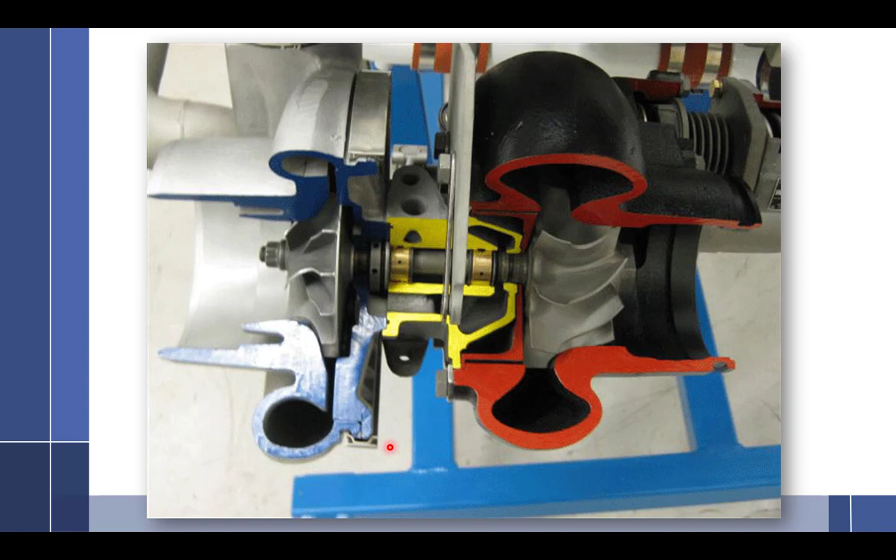All right, there's just a cutaway of a turbo. Let's see, which side do you think is the compressor—this side or this side? Red or blue? You guys are just so stinking smart. It's the blue side. Why is this red over here? Because it's hot.

As air enters the compressor, it's going to come out through the edges, be compressed. There's a lot we could talk about with this turbo. These things take a punishment, because we're talking extreme heat over on this side, right? And that means you have to be very careful with what kind of seals you use in here, because those seals are going to melt.

These are spinning at some extremely high RPMs. It means we need oil fed through here. But the temperature in here is so hot that oil left sitting there is going to coke. And if you coke that oil up - remember, coking is when oil crystallizes - you're going to ruin your turbocharger. So pilots who care about their turbocharger will always do a long cool down period. Why are they just sitting there? Well, it's because they had a flight, they came in, they landed, and they weren't going to just shut down their engine. They're going to sit there and let that turbo cool way down and let the oil flow through until the turbo is cool enough that when they shut down, whatever oil's left in this area isn't going to coke on them.

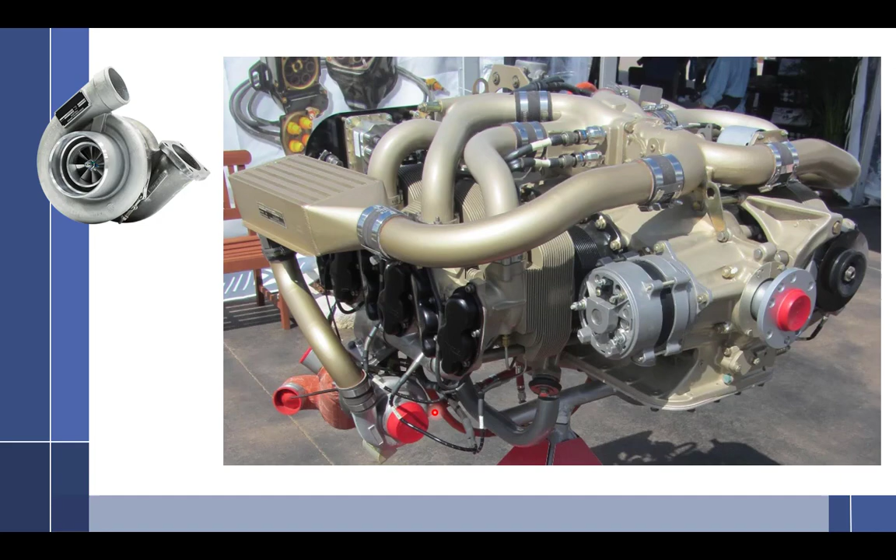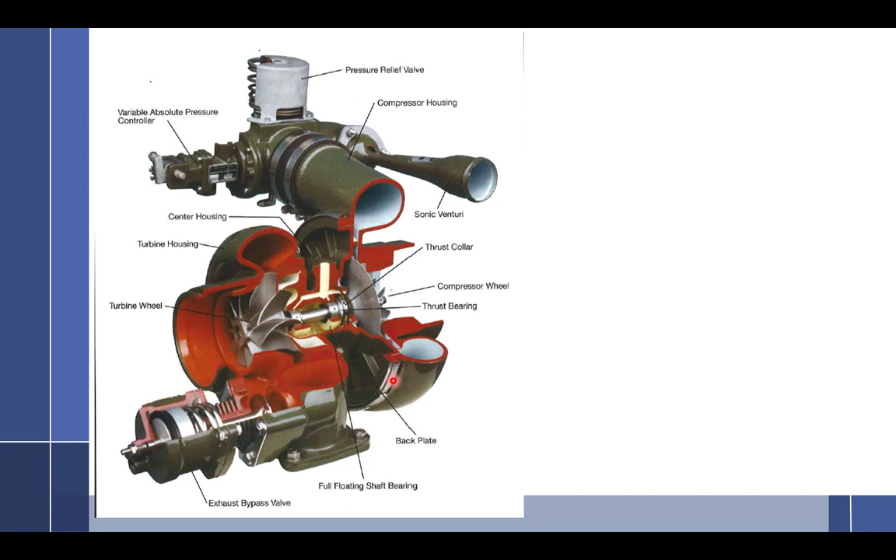All right, just another cutaway. Should you do a cooldown period for non-turbocharged aircraft? I would, if you need to. I wouldn't want to bring a hot engine in. So what point does it go from cooling - because you shouldn't sit on the ground and bake your cylinder - so what point does it go from cooling down to heating? Oh man, let's talk about that a little bit later. I've got to get through turbos or we're never gonna. We're gonna be doomed. So the question is, at what point is it cool, or are you risking hurting your cylinder sitting there on the ground?

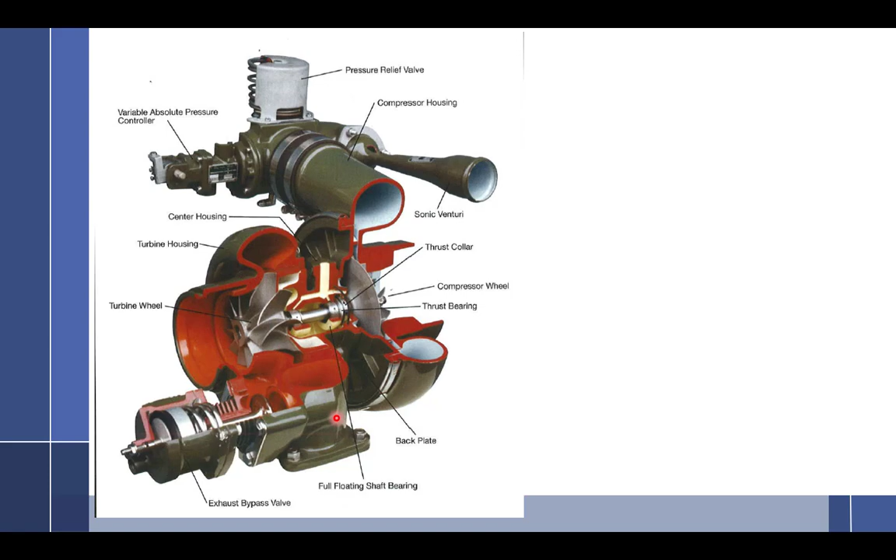All right, just another cutaway, but this time we're going to have a bunch of controllers on it. We're going to talk about those controllers here in a little bit, maybe. All right, turbocharger, let's see.

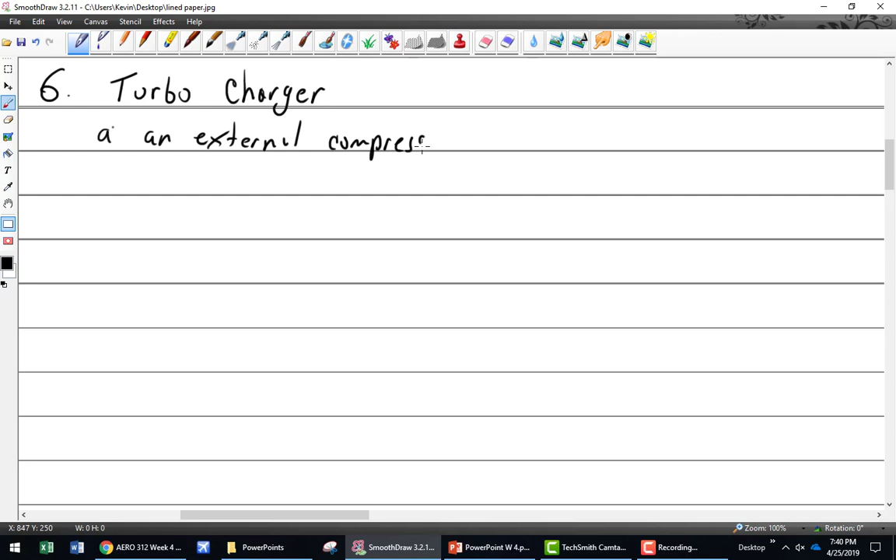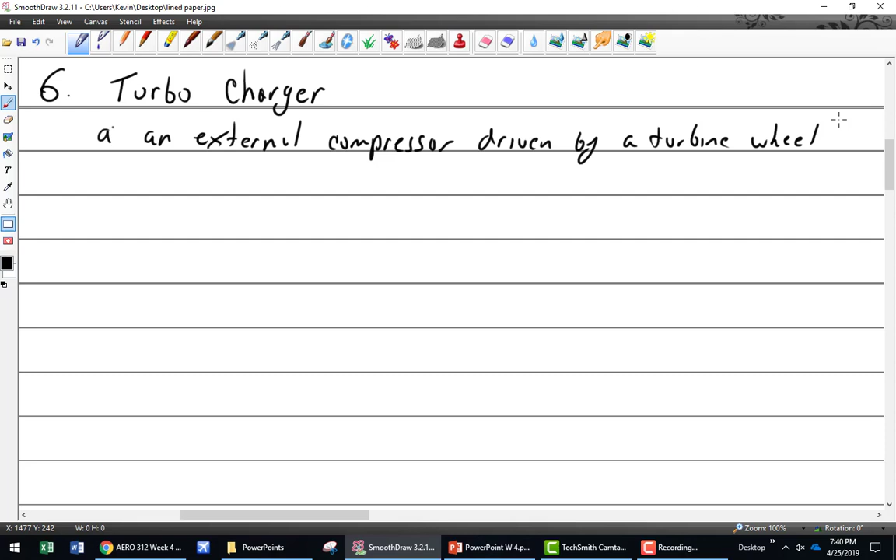An external compressor driven by a turbine wheel that gets power from exhaust gases.

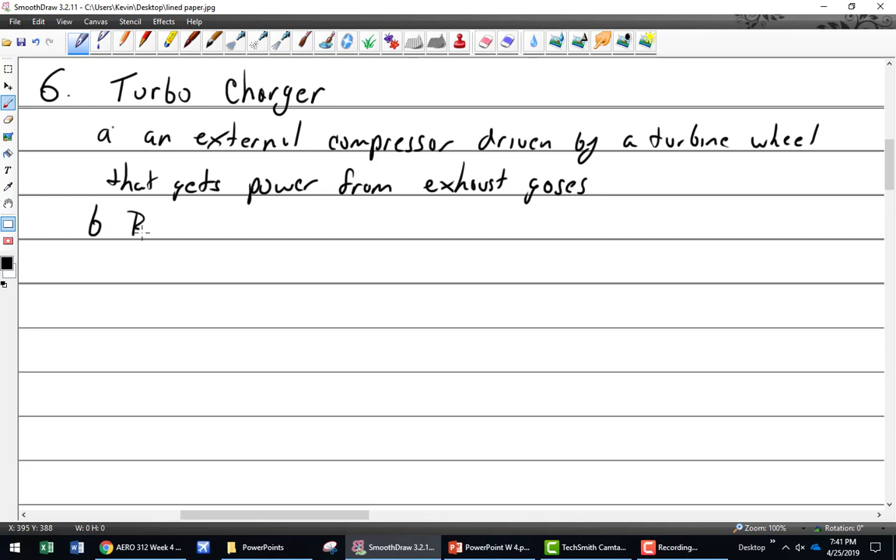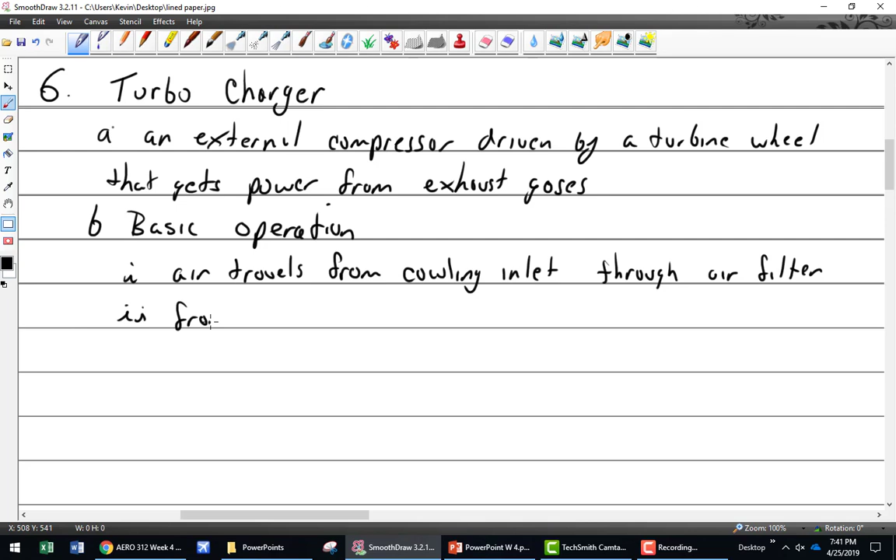All right, your basic operation, which is what we just went over. We have air travels from the cowling inlet through air filter, then it goes from the air filter into compressor, as air is pressed outward by the centrifugal force to the outside of housing, the air is compressed. We can abbreviate that, put compressor. Compresses the gas.

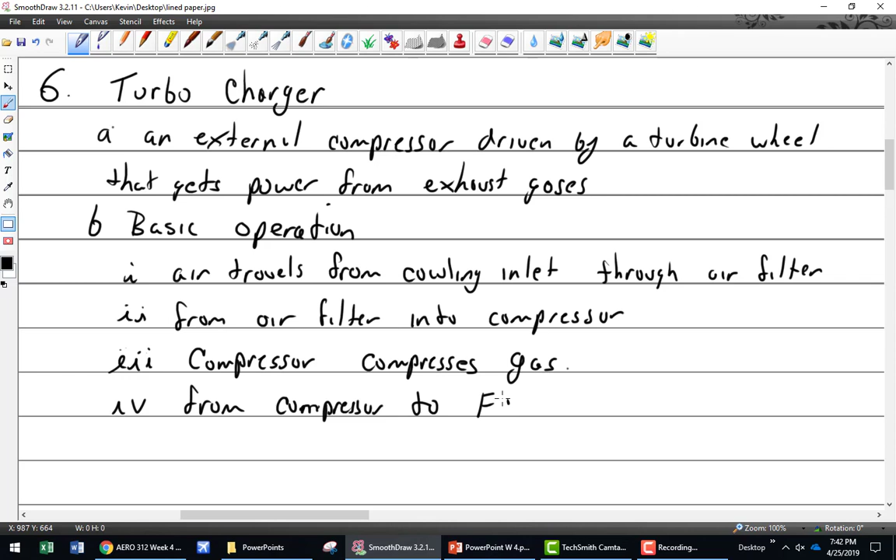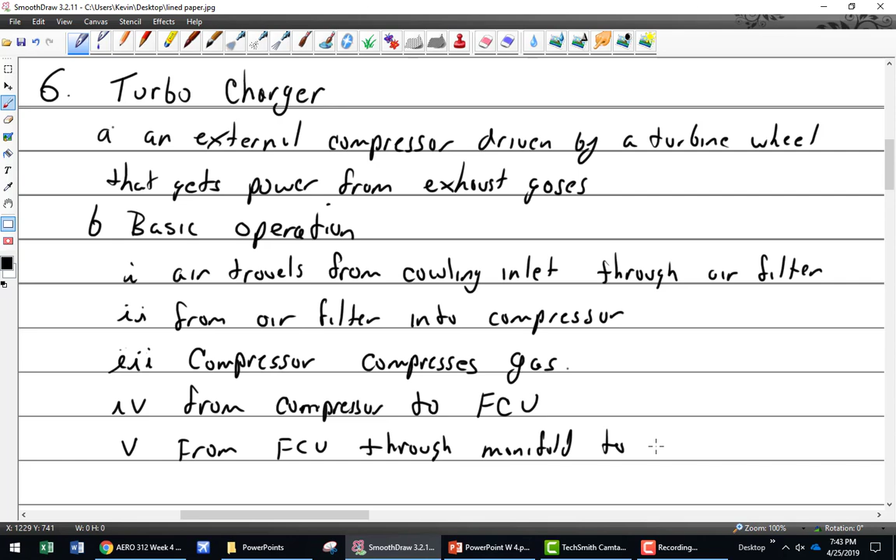Then it goes, after the compressor, what's the next stop? Upper deck. Well yeah, okay, so it's the upper deck from compressor, to the fuel control unit. From the fuel control unit to what comes next? Yep, we'll say through manifold. To cylinders. Combustion. We'll call it combustion air, or we should call it exhaust. Combustion air enters exhaust pipe.

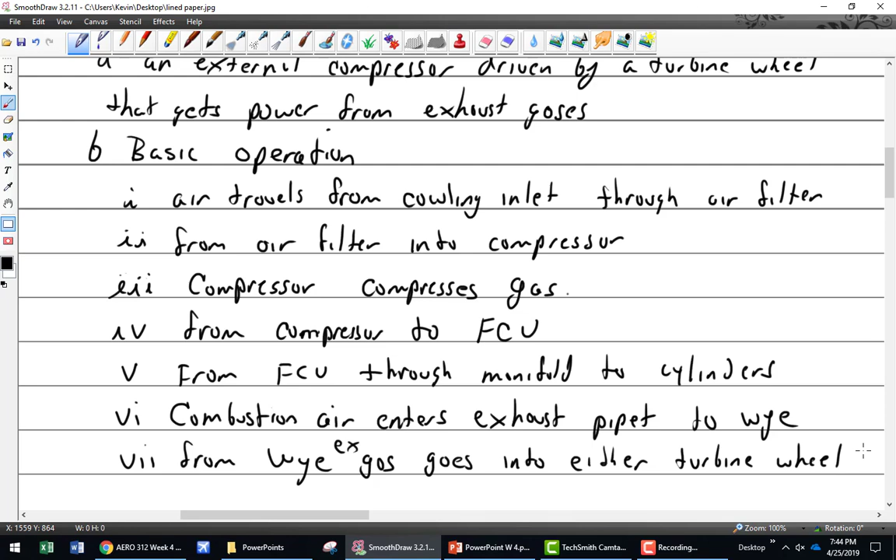To the Y gate, or to the Y, I should say Y. To the Y. From the Y, exhaust gas. Exhaust gas goes into either - what do I want to say there - actually, yeah, either turbine wheel or overboard.

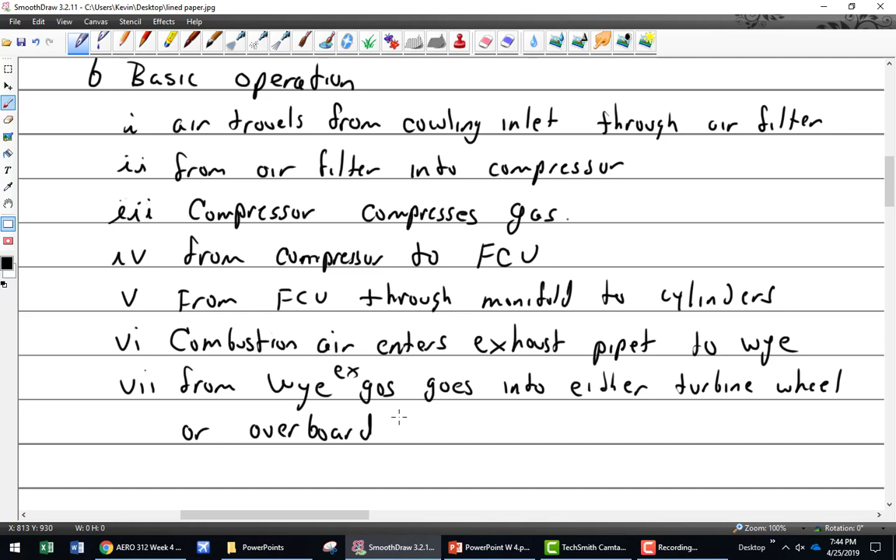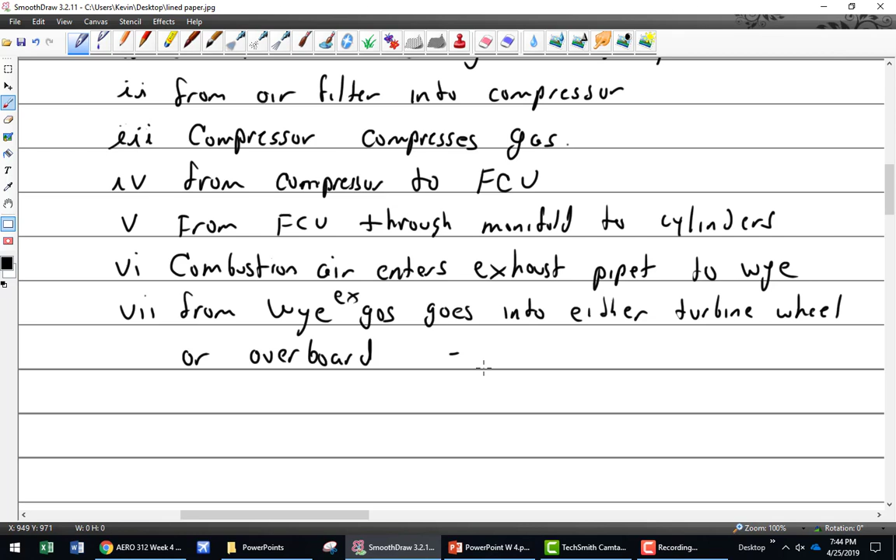And what decides whether it goes overboard or to the turbine wheel? It's called a wastegate. What do those look like? Just like little boxes, a pipe you go straight or out with a valve in it. Crudely drawn, but I'll show you some pictures.

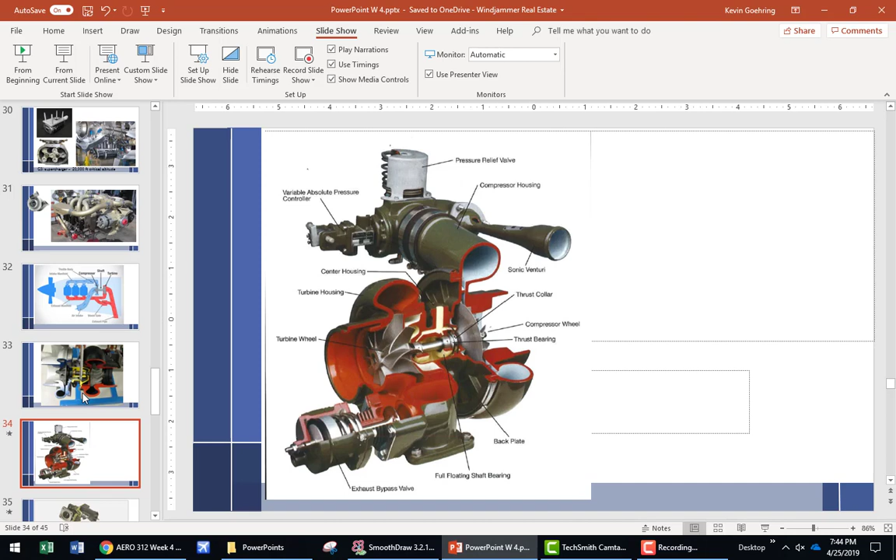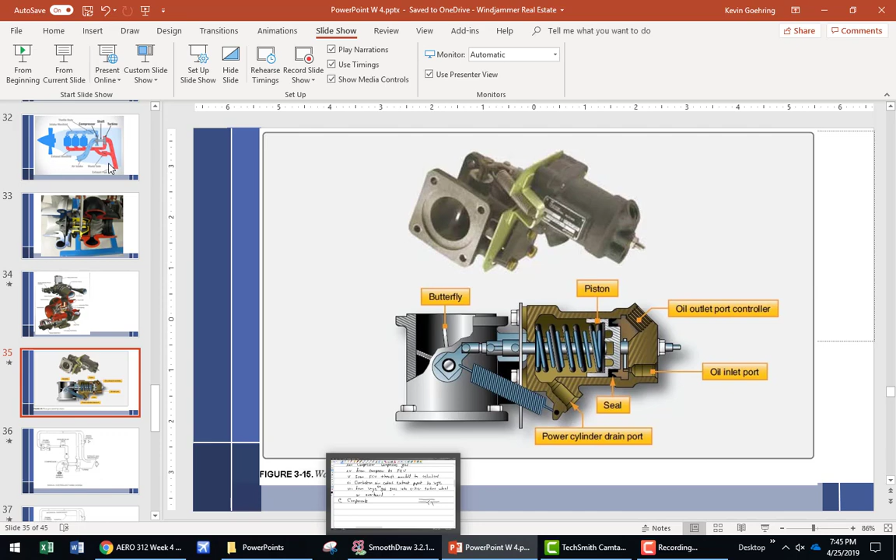All right, components. Let's see, I've got a picture of a wastegate. Here's the wastegate right there - that's the actual wastegate, not the Y part. That is right in this area, in the exhaust part, near the end of the exhaust.

Wastegate open, turbo off. All right, so components - we've got the turbocharger, made of Inconel.

Not all of them, but I found that. What else is made out of Inconel? Your fire safety - continuous loop fire detection system. What else? Same stuff as exhaust valves.

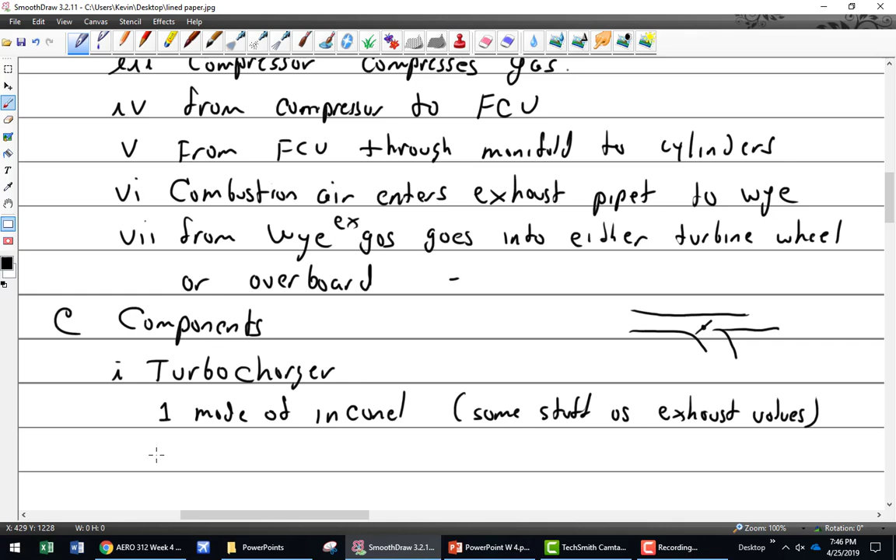That's some high temp stuff, right? And of course your fire loop. Why would you want that made out of Inconel? So it doesn't melt. Or we could make it so if it does melt, it sets off the fire alarm, right? Yeah, it works by grounding out and it sets off the alarm.

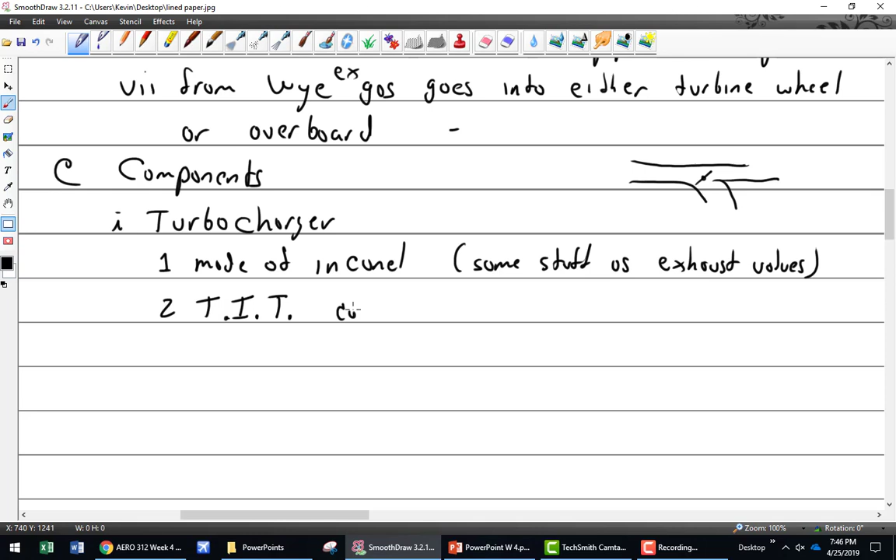So what does TIT stand for? Turbine inlet temperature. Turbine inlet temps can reach as high as 1650 degrees F. That's very high.

So is the turbocharger the turbine, or the whole thing? It's the whole thing - you have the turbine wheel and the compressor side, but together as a unit we call it a turbocharger. It's a precision balanced rotating shaft with a radial flow turbine on one end and a centrifugal compressor on the other.

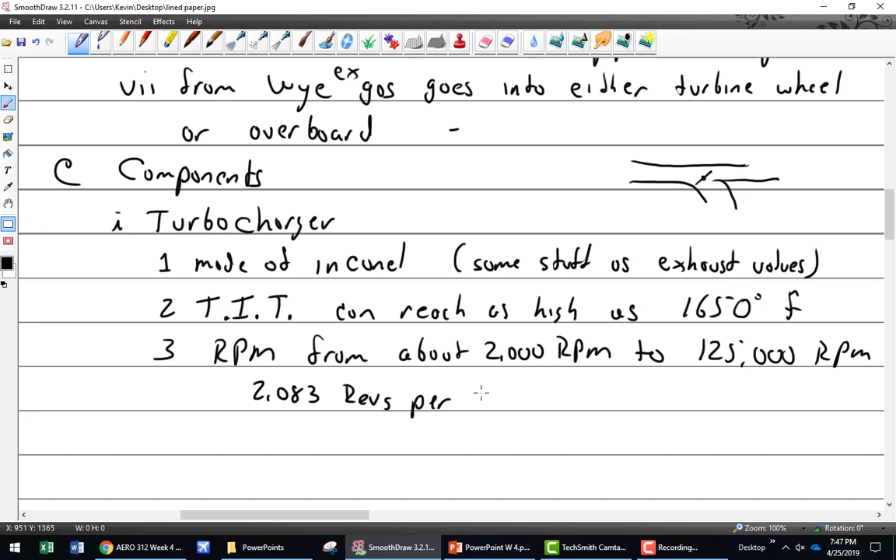Let me see, RPM ranges from about 2,000 RPM to as much as 125,000 RPM. So it's moving fast. By the way, 125,000 RPM works out to be 2,083 revs per second - that was really hard to count.

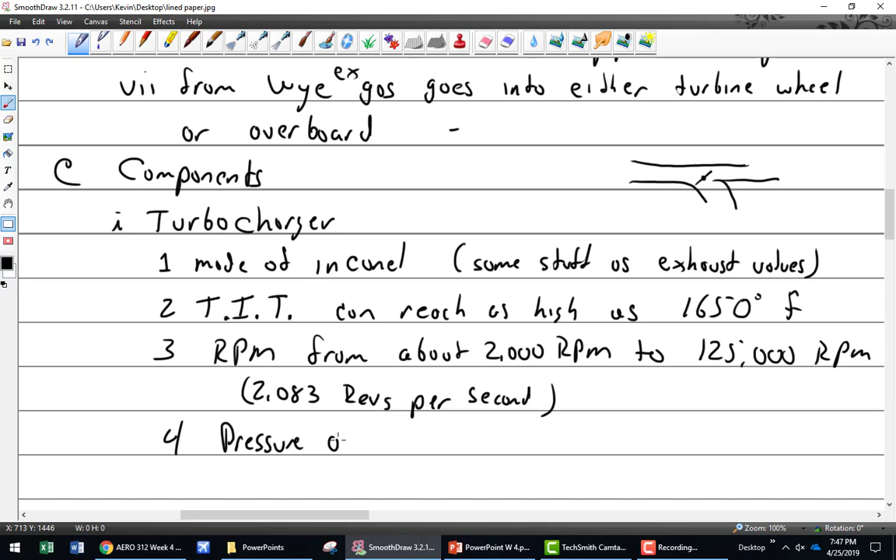It has a pressure oil fed plain bearing. Why a plain bearing? I know, why not ball bearings?

Heat dissipation's a good answer. Wonder if they can handle that speed. Ceramic bearings can only go to 50,000 RPM. So ceramic bearings can only go to 50,000 - but that's where they designed them.

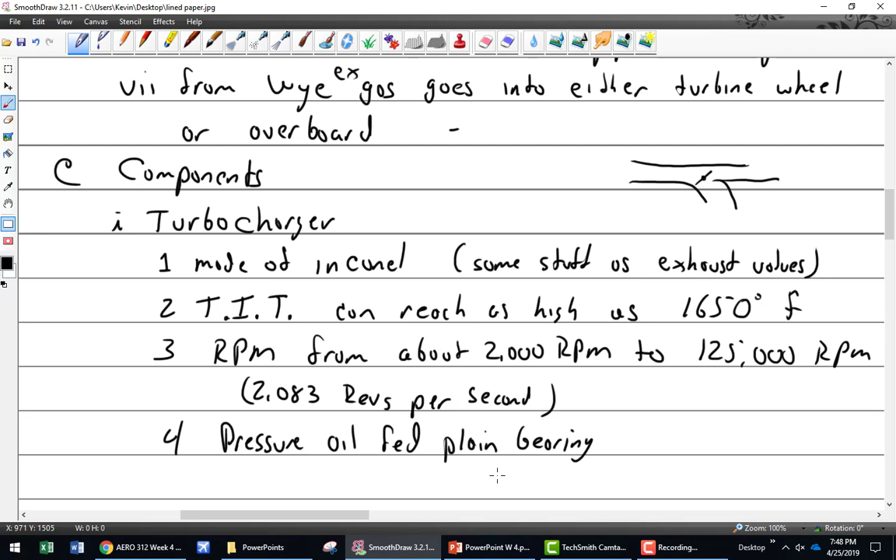So it's a pressure oil fed plain bearing. What happens if you run out of oil on a plain bearing? It starts eating metal - it dies, it quits. It runs about 30 to 50 psi, so it's reduced a little bit, at 1 to 2 quarts per minute.

And oil may be returned by a scavenge pump.

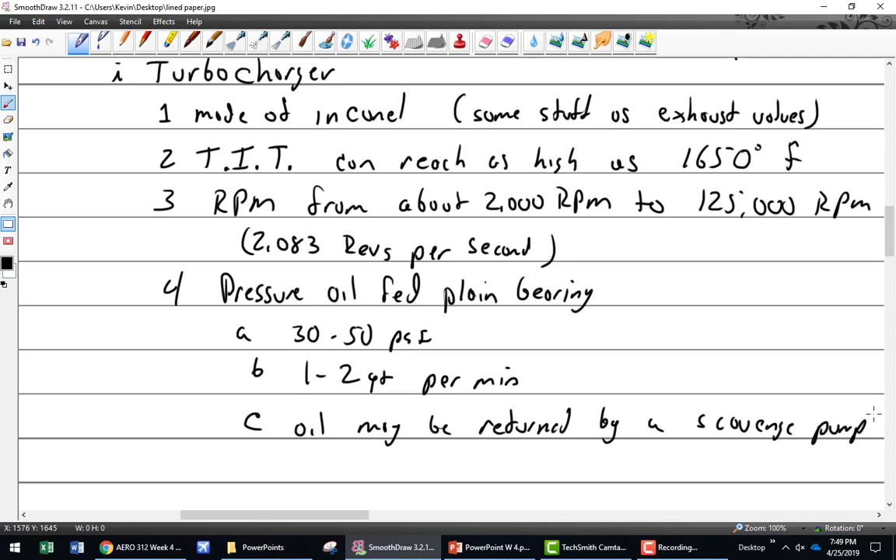All right, there have been problems - this is an area that gets messed up. These turbochargers require all of this oil, but sometimes people get fittings mixed up. There's another fitting in the system with an orifice on it, and you don't want that orifice connected to the turbo feed. If you have that restriction going to your oil feed, then you're going to restrict the oil to the turbocharger and it's going to burn up. There have been cases where mechanics have continuously put the wrong orificed restricted fitting on the turbocharger because they look similar on the engine, and burned up turbochargers a couple of times before figuring out exactly what happened. So don't do that.

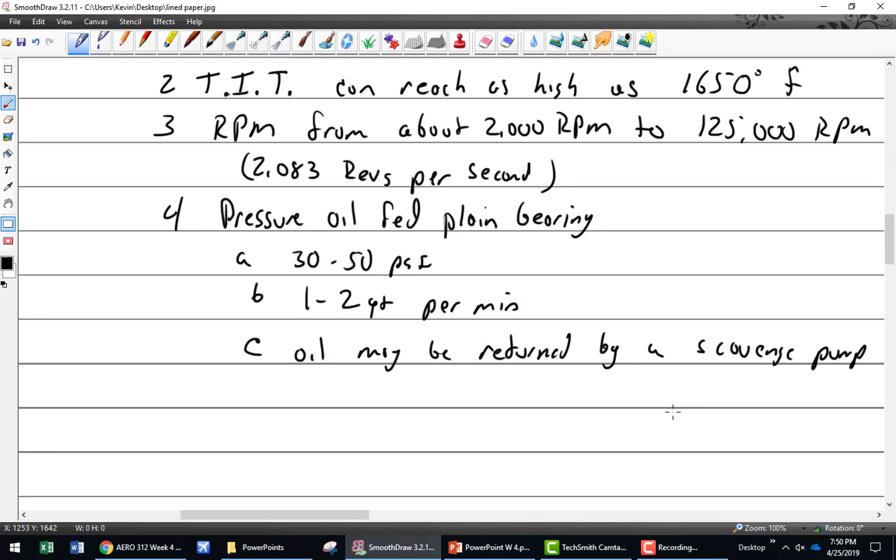So you've got to be really careful which ones you're hooking up. And what number am I on? Turbo components, 1, 2, 3, 4, 5.

I'm skipping some stuff. We have the Y gate, or the Y, W-Y-E, which provides a path to either the turbo or exhaust, waste, or overboard.

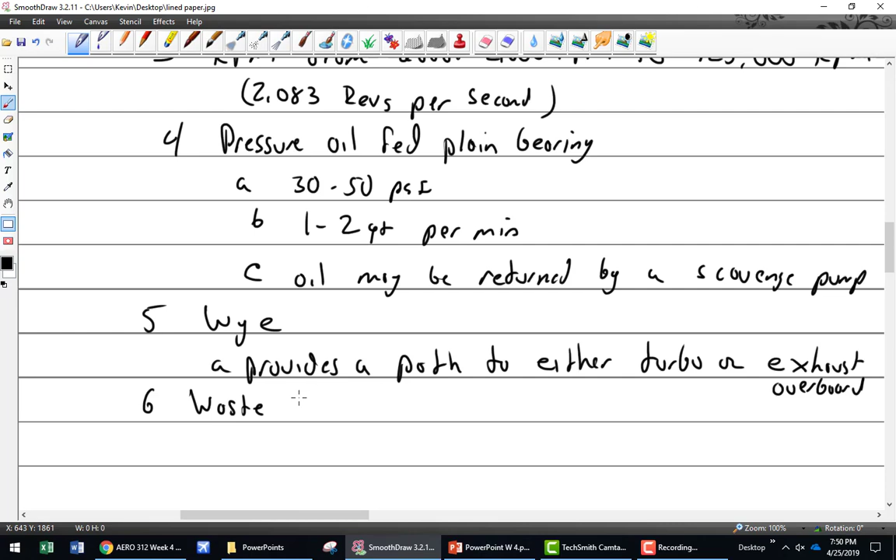And then we've got the wastegate. All right, so the wastegate has to be installed in the exhaust line. And by in the exhaust line, I mean we get to the Y, and it's got to go either to the turbo or overboard. So it's got to be not in the route to the turbo, but to the overboard. Otherwise everything we say here isn't going to make sense.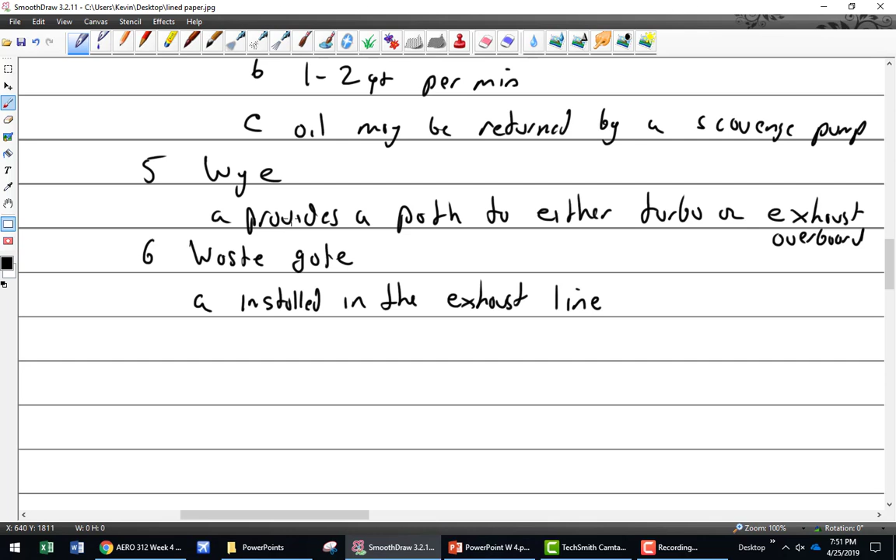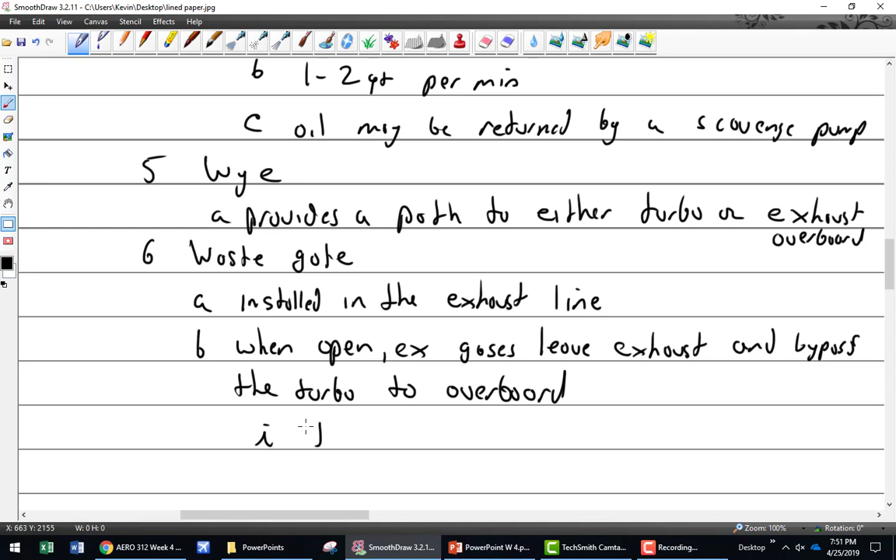So when open - I'm going to abbreviate exhaust by EX - exhaust gases leave exhaust and bypass the turbo, to overboard. Got that? That means turbo off. So open is off.

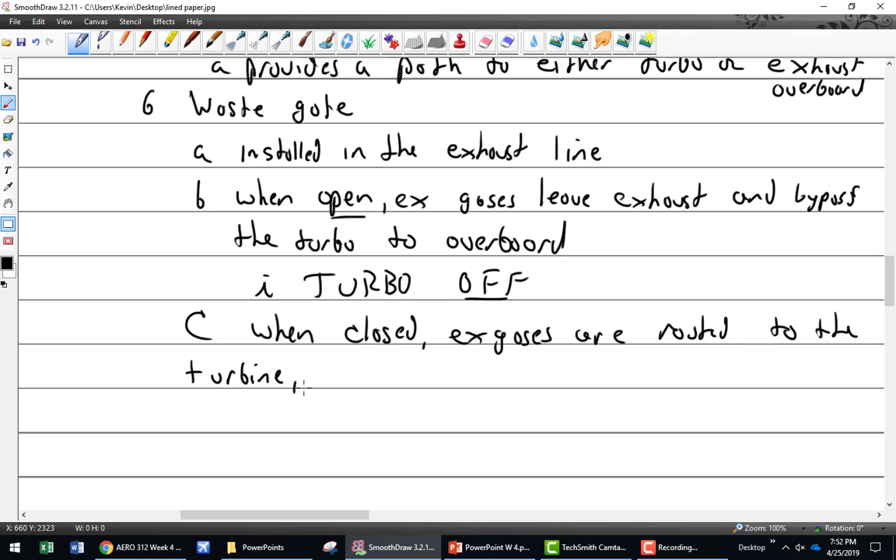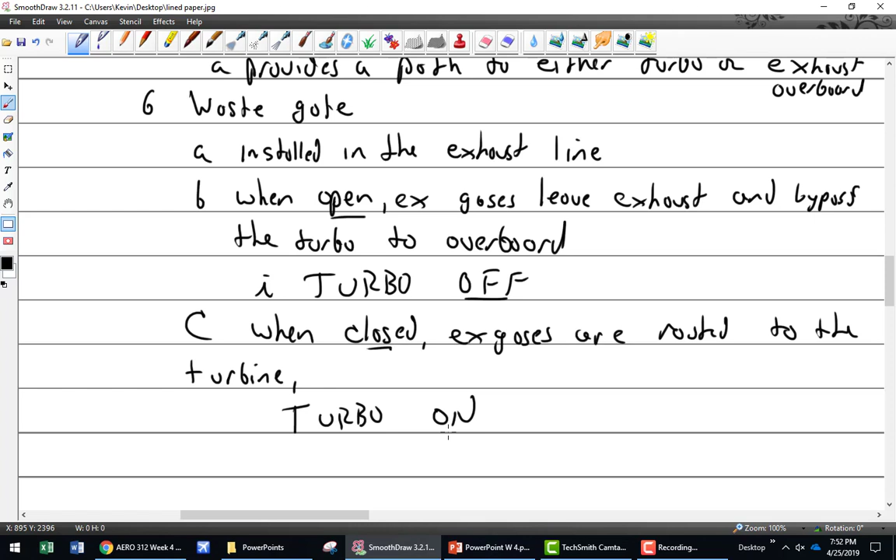When closed, exhaust gases are routed to the turbine, which spins the compressor faster. That is turbo on. So closed is on. And if you can get that straight, things will go a little bit easier.

There are 3 basic types of wastegates.

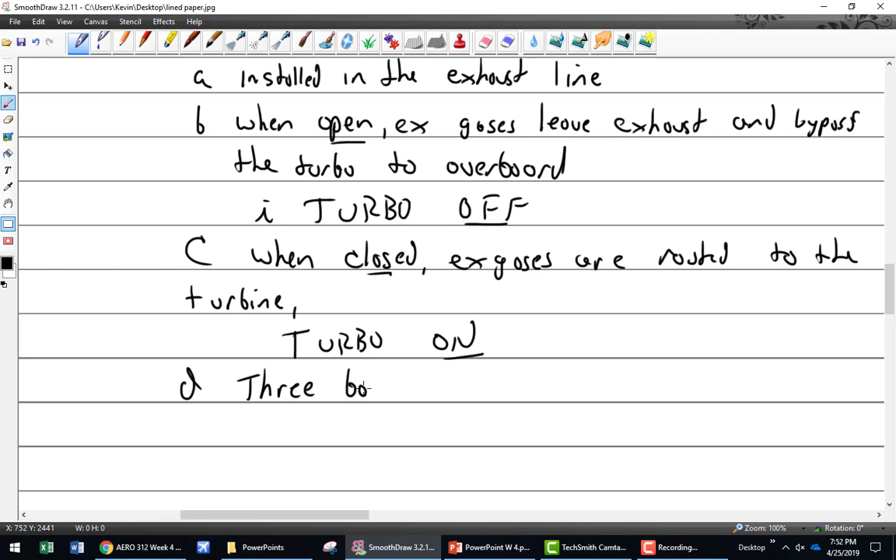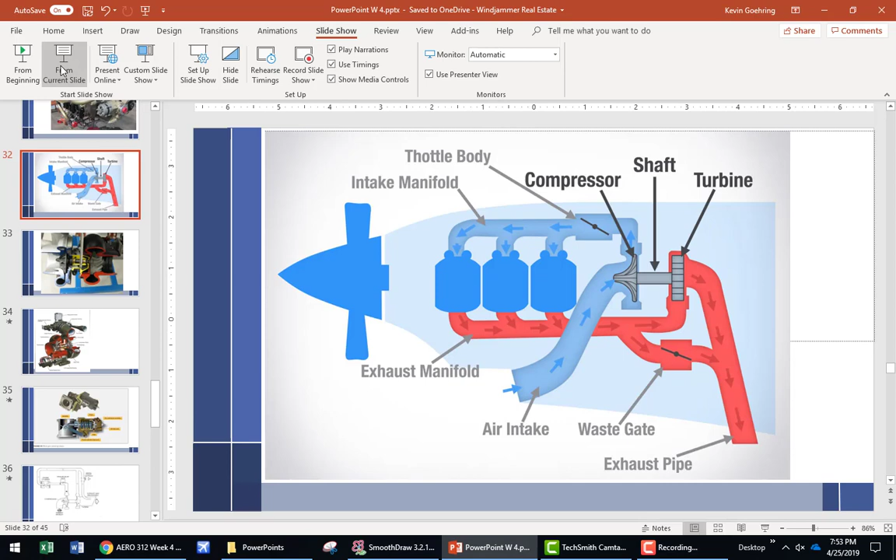All right, let's review. We're talking about the wastegate, which is located right here, on the exhaust side of the wye. So here's our wye right here.

So there's our wye. If this is open, is the turbo on or off? Off. If this is open, the turbo's off, because gases are going to take the path of least resistance. They're going to want to go out this way, not through the turbine restriction, out and down. If it's closed, then it's going to be on.

And I'll tell you a secret: it's never all the way closed. It's never in a position where it touches. You always have turbine wheel movement. You never want the turbine wheel to sit still, because you still get hot exhaust gases coming this way, and if it was sitting still, it would bake and have uneven heating. Uneven heating causes stresses, and you don't want that. It never goes all the way closed because with this butterfly valve, if it were to make contact, it could actually melt or weld itself in that position. So there's always a little gap. The turbine is never all the way off; you always want it rotating, even if somewhat slowly.

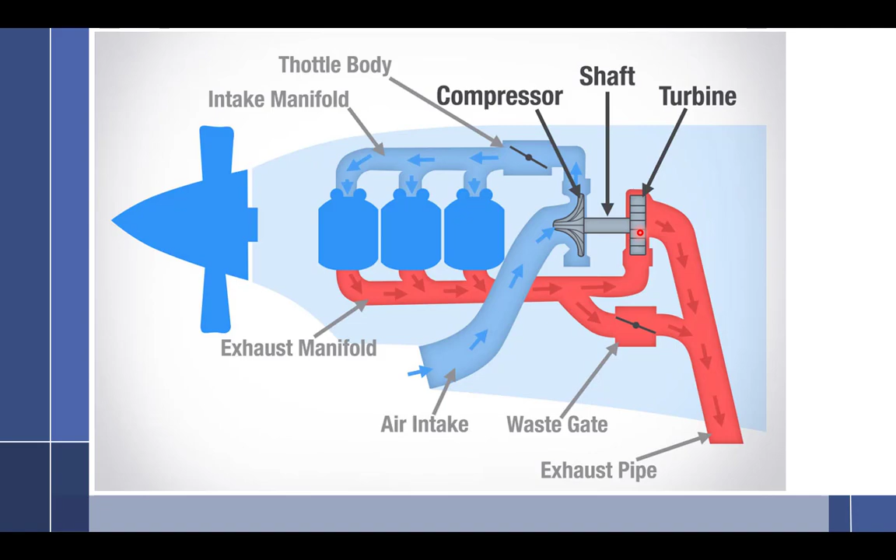All right, so there are three types of wastegates. Well, this is just out of order. All right, manual controlled system.

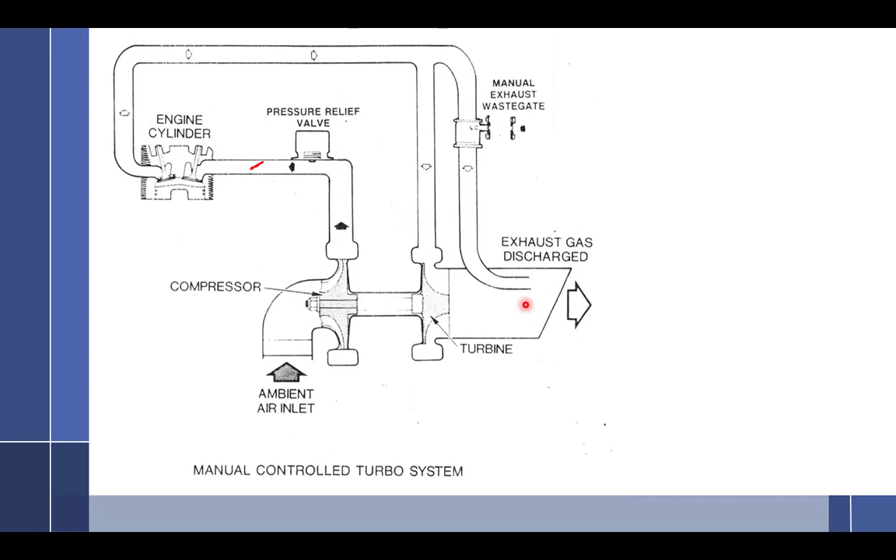So let me see, I said there's 3 types. Let me see - one type I didn't talk about, but I could, and believe it or not, this Piper Seneca is this way. This is just fixed. There's no adjustment at all by anybody.

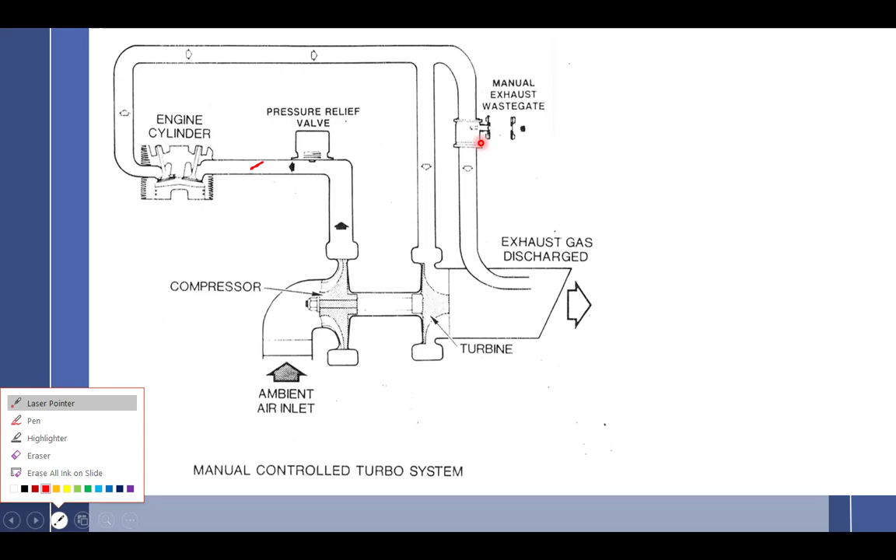It's just an absolute - a big bolt that goes in there, and it's set at the factory, and you really don't ever change it, and you hope you don't, because if you've ever had to try and change a bolt that's been sitting in an exhaust system for a couple hundred hours, you're not going to move it. And if you are moving it, you have to ask yourself why am I moving this - what's something else going on here? This shouldn't be adjustable, not once it's set. So that's what Piper Senecas used, which is actually a nice plane, very simple system.

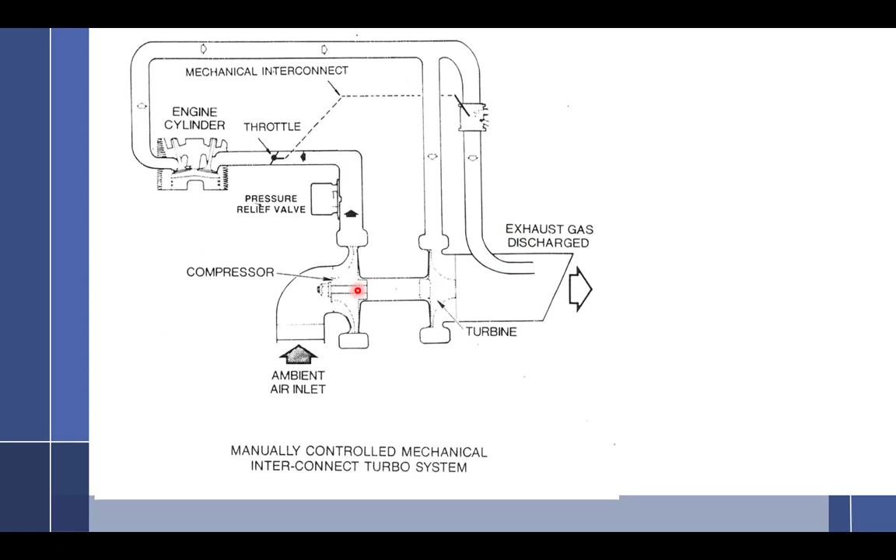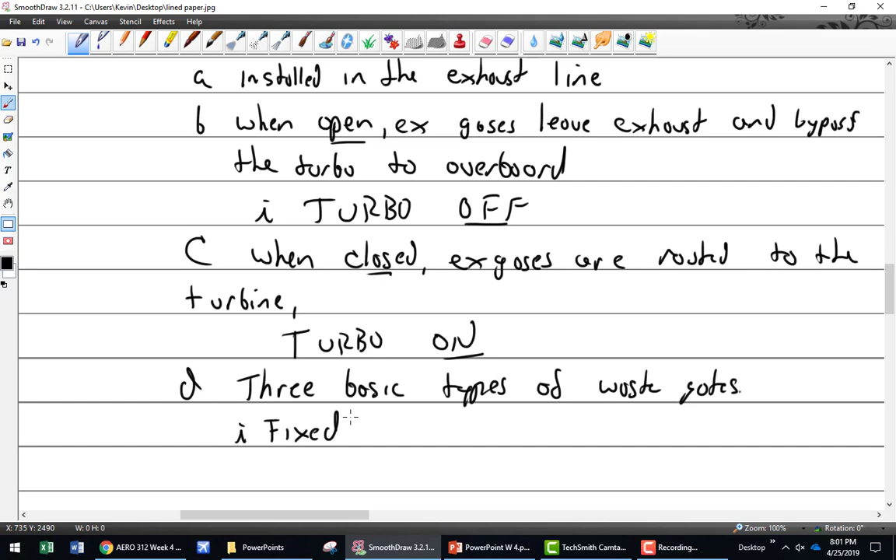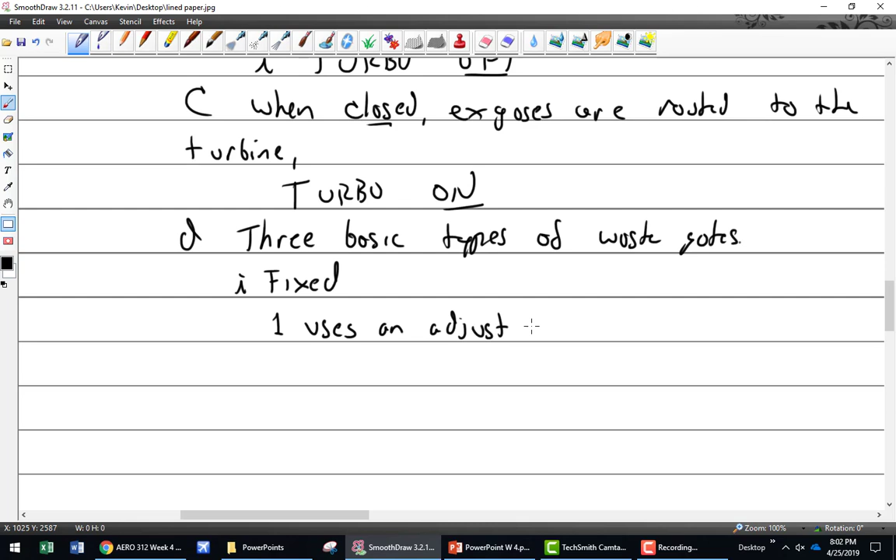All right, so I had three basic types of wastegates. We have the fixed, which uses an adjustable screw - and I'll say adjustable because it's really not. I don't even think screw is the right word, I think a bolt is a better word - an adjustable bolt to block a certain amount of exhaust. And that's all it does.

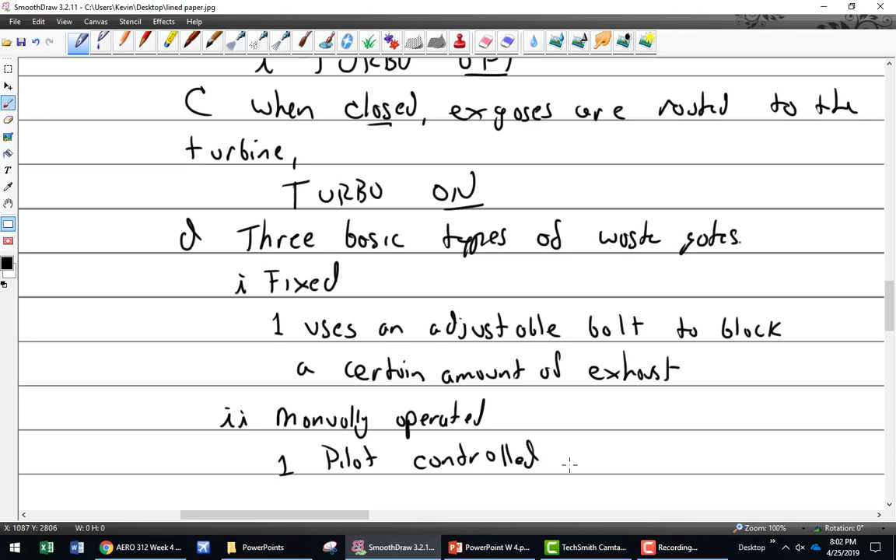And then we have manually operated, which means it's pilot controlled. Manually operated - we can put pilot controlled with a push-pull cable. Or we can have the interconnect.

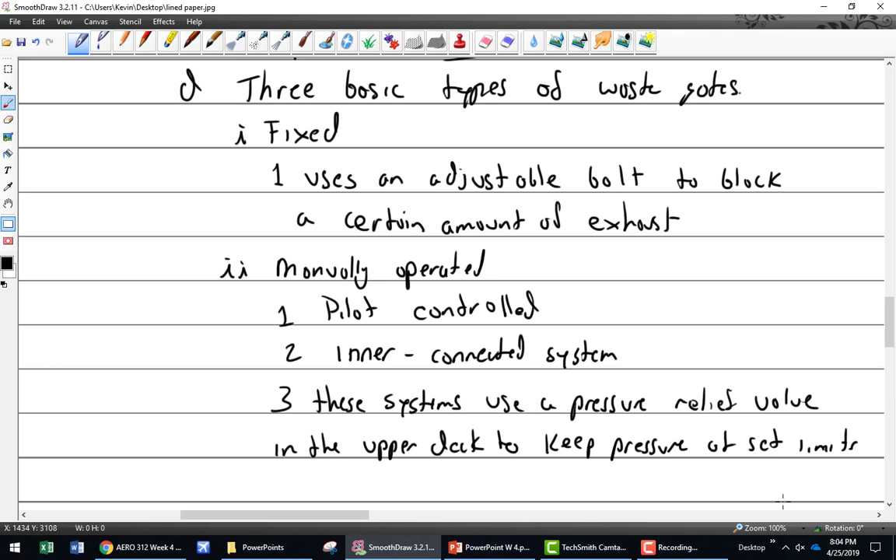So basically, in automotive terms, it would be a blow-off valve. That's exactly what it is.

Well, no time for stories, but my son hooked me up with a Ferrari dealership, and we got to take a Ferrari out. Sorry, Westlake Ferrari, but yeah, I hit that pop-off valve on that Ferrari. It was loud, it scared me, I thought I broke it. It happened so fast, the tach was built into the steering wheel, and I had it on manual. I hit the throttle and had no idea, just saw a blur go to red. I hit the rev limiter and heard the pop-off valve go that fast. It was like, wow. It was faster than I could actually see it happen. I didn't have time to look down and see what had happened. It was quite a car.

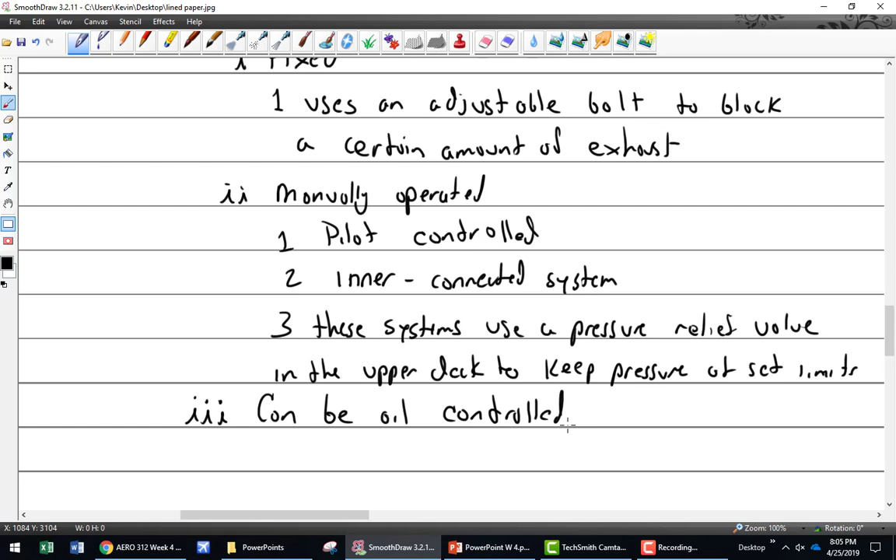It can be oil controlled. Oil controlled is where we're going to spend most of our time, because most wastegates are, in fact, oil-controlled. All of the controllers set up within the turbocharging system now, and we're going to add a bunch of them, are all oil-controlled. So before we do that, let's talk about oil control, look at pictures, and see if we can make sense of this.

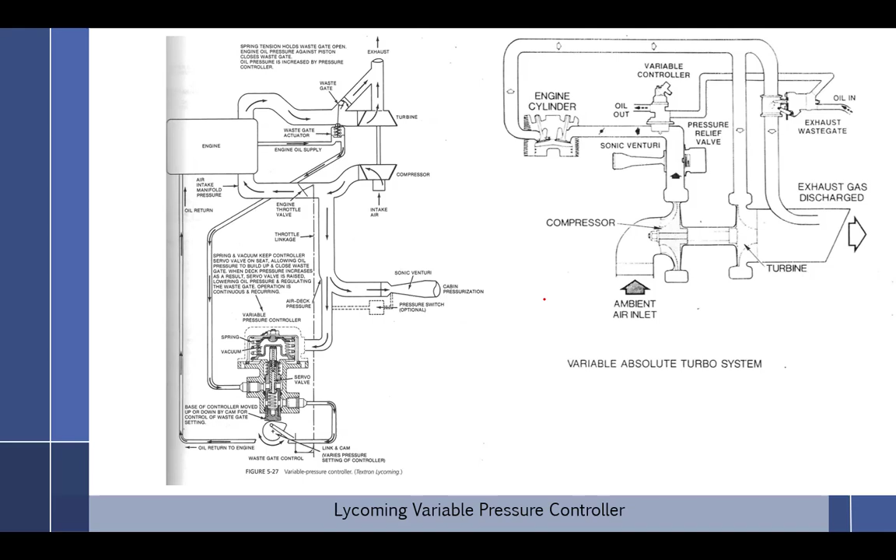Yes? Are there 2 oil returns listed? Oil return here and oil return here. Yes, because each one has its own. Are they parallel or series? Parallel. They're parallel. They operate independently. If it was in series, that wouldn't be a good thing for this one.

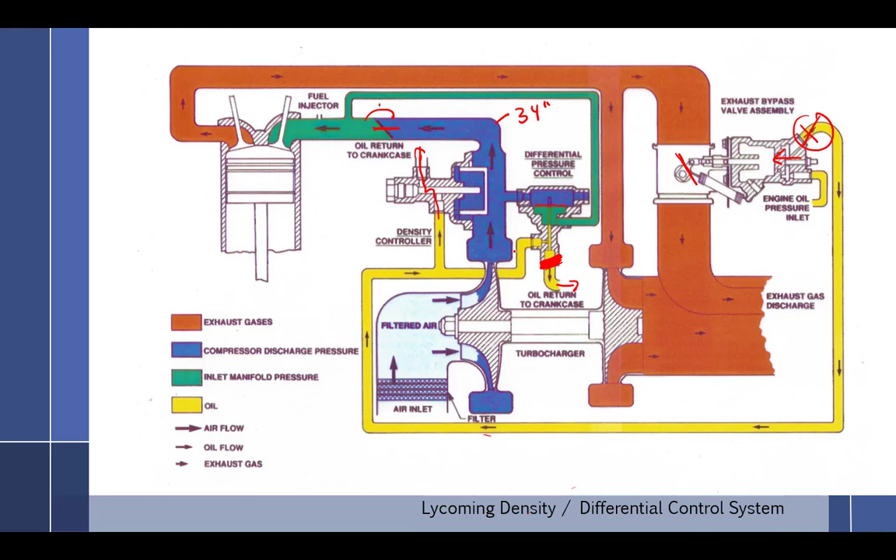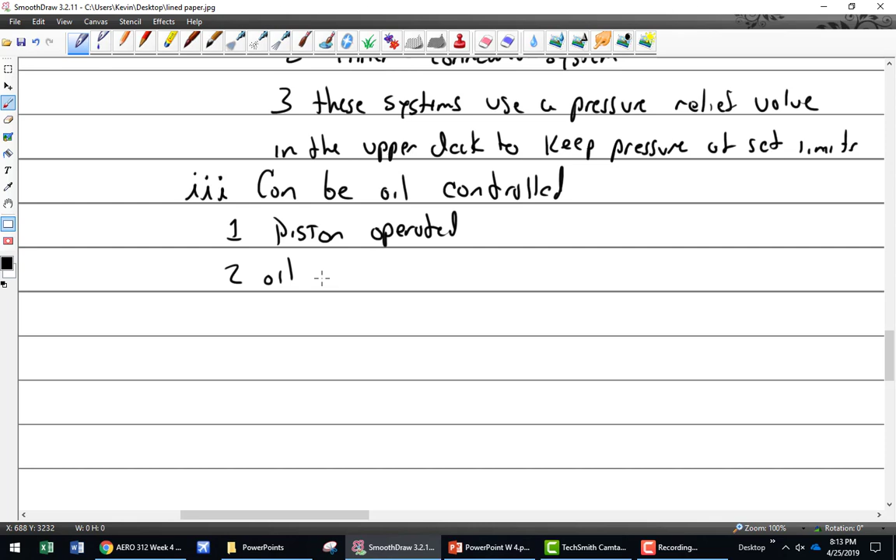Can be oil controlled. Well, that means that it's a piston operated. Oil pressure is fed to a piston.

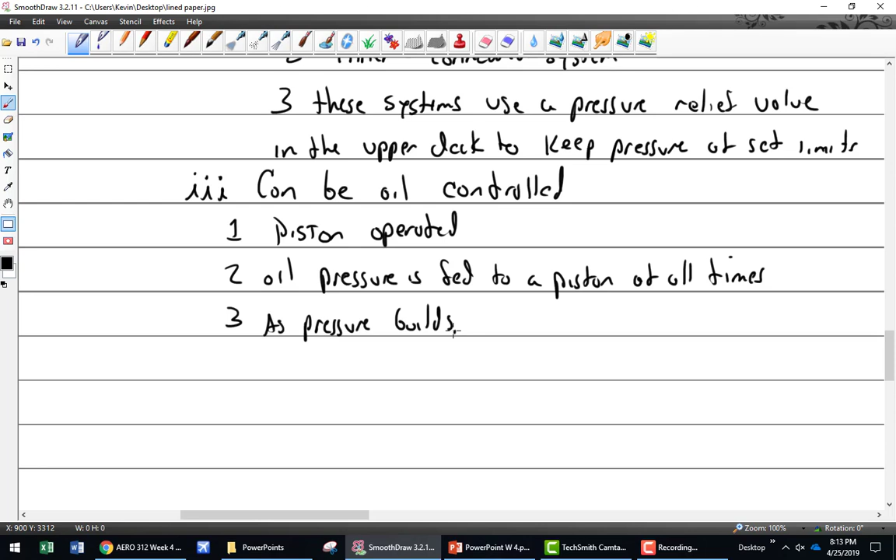We'll say at all times, you always have that oil pressure going right into the wastegate. As pressure builds, the wastegate closes. Is that turbo on or off? So as pressure builds, the wastegate closes. That is turbo on. When pressure is bled off, the wastegate opens. Turbo on or off?

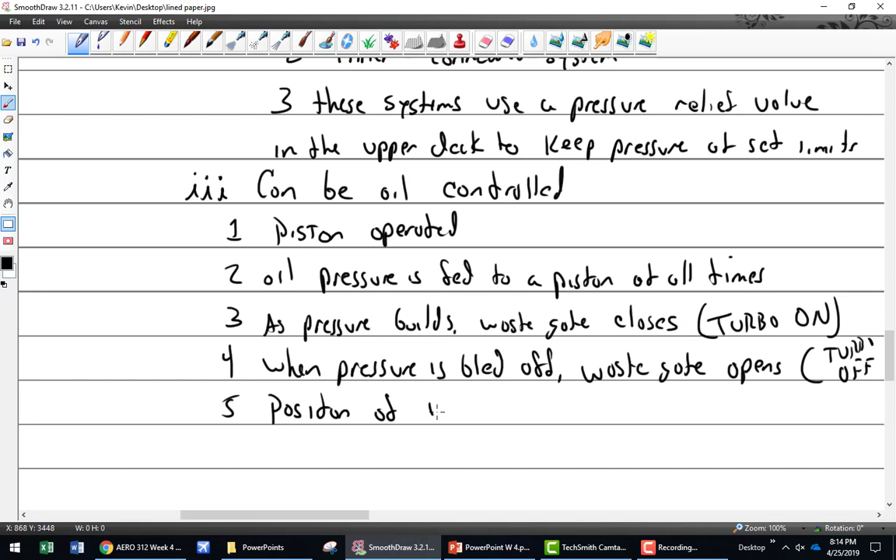Turbo off. And it's not either or. It finds a spot in the middle. You can go all the way open, all the way closed, or in the middle, trying to get a position. It is variable. The wastegate is never fully open or closed.

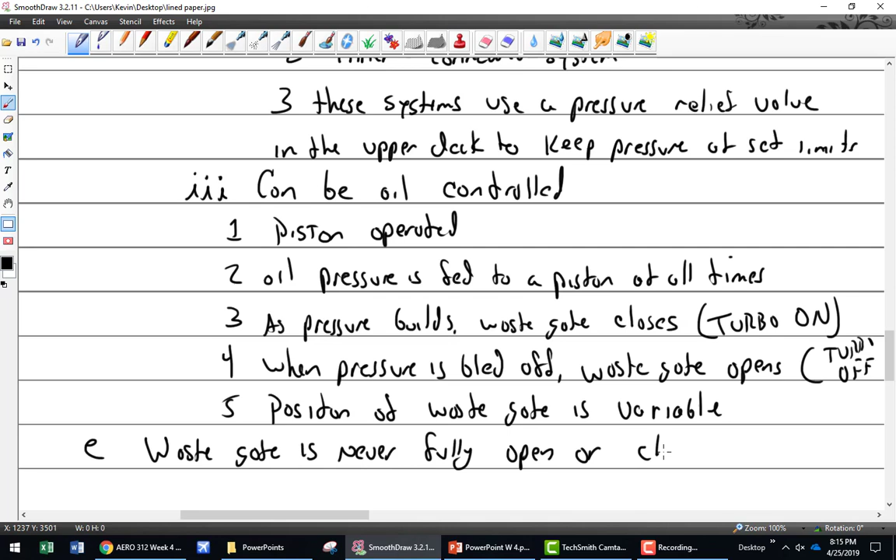If it's fully closed, I said it could actually stick, and you don't want that. Let me see. Oil cokes.

Does anybody remember what temperature oil cokes at? Want you to know because I gave it in Celsius. Very hot. 300 degrees. Oops, I wrote F, jeez, Celsius. So 300 Celsius, which is 500 somewhere, 575 Fahrenheit.

And that's why cool down periods are important. So cool down periods are important, because what was the turbine inlet temperature? 1600 and some odd degrees is correct, 1650. All right, so we got to get it down to 575, so we got to let it cool down. If you don't, what happens is the oil is going to go in those bearings, it's going to shut down, it's going to coke up, and then guess what? Now the turbo's off.

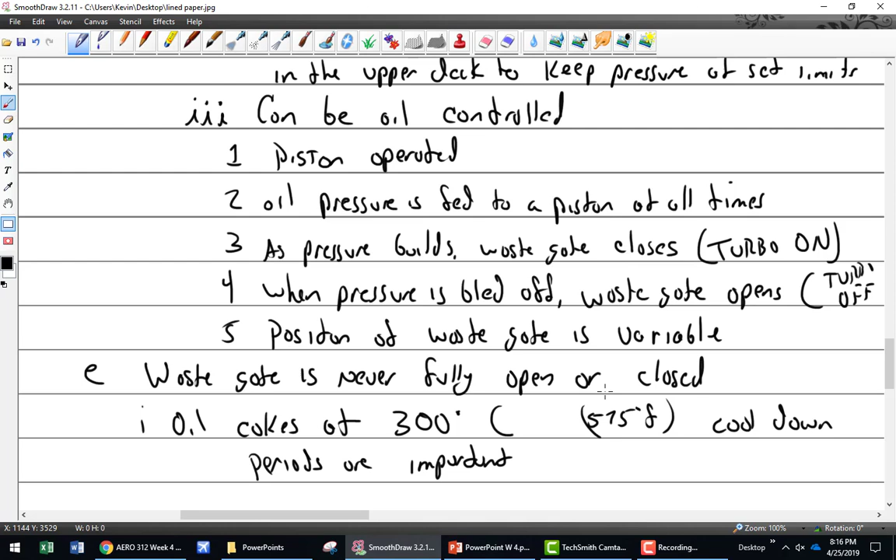When you're doing an annual inspection on turbocharged engines, the checks are you always have to pull off the inlet hose, and you have to do an inspection for FOD damage on the turbine, on actually the compressor wheel. I can't really see the turbine too well. And then you also spin it, and you listen very carefully for any rubbing or any spots that aren't spinning nice. Don't put your finger in there while it's running, because at any RPM it'll come out kind of short. In fact, the turbine side gets so hot, and these things spin so fast that they stretch, and they can actually get to the point where they'll start rubbing on the case. And if they're rubbing on the case, then they're not very effective.

And then, so it's never fully open or closed. Why would I never want fully open? It's kind of maybe not the best way to say it, but the turbocharger's never fully off. And why is that? Because you can melt the turbine, or cause uneven heating, which causes stresses, and that's bad.

All right, so let me think, what do we got here? Can exhaust gases from the turbine ever enter the compressor, like a leak? No, but what can happen is the seals go bad and then oil leaks out.

And then you get either oil going toward the compressor side or the exhaust side. If you have a bad seal and the oil goes toward the compressor side, what symptoms would I find? Like smoke, going toward the compressor side. You'd have smoke come out of the exhaust. You could, but more often than not, it's going to foul out plugs. What if it goes out the exhaust side? Still smoke? Now you got your smoke. Now you're more prone to get smoke out that side because it's oil going straight out. But yeah, you're right, if you're burning oil, you can still get some smoke.

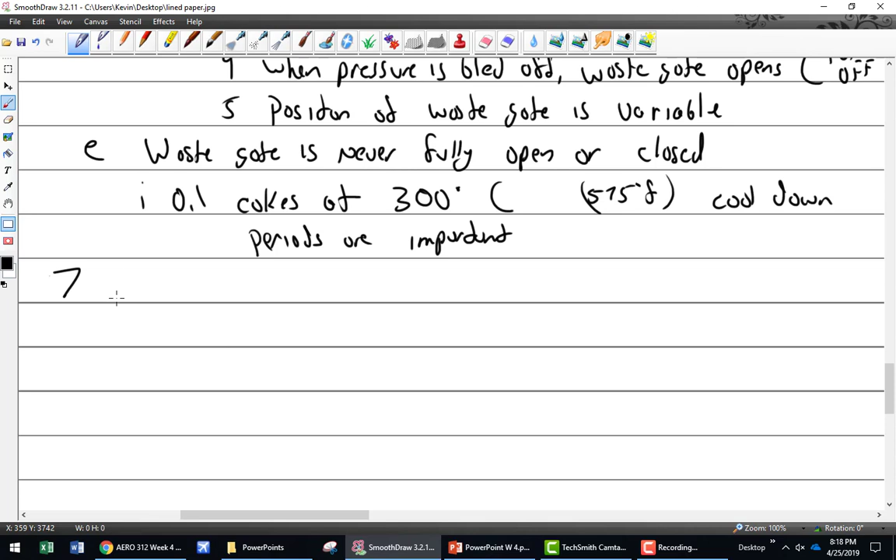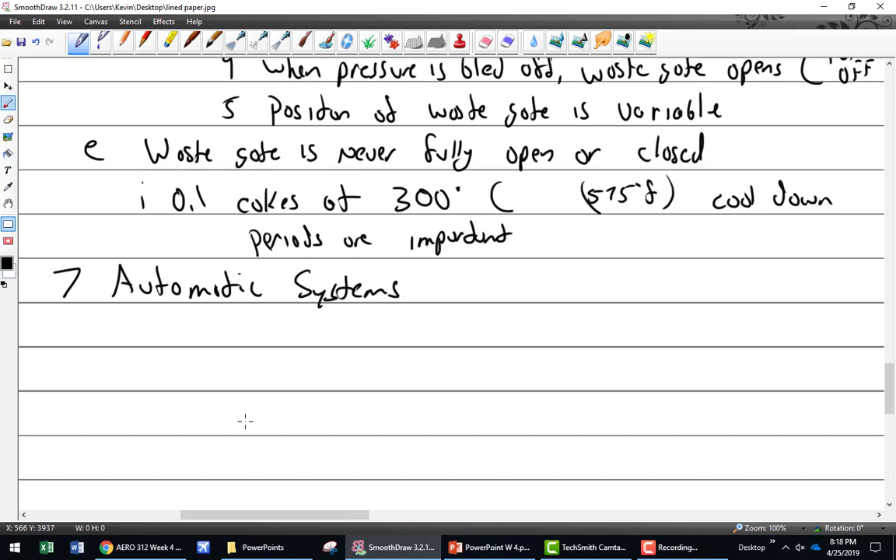Let's see, I have automatic systems. And this is what we're going to talk about, what we just went over with the Lycoming systems. And we can do that right after the break.